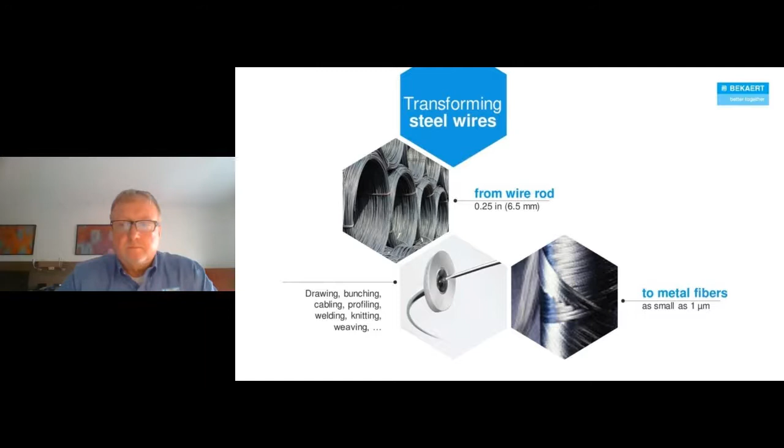I show this slide to illustrate the background of Bekaert as a solid world leader company with many resources, very serious about innovation and new technology. Located in 120 countries, Murfor Compact was launched several years ago in the European market with great success. This occurred around 2016, 2017. The success was so great, we decided to bring it to North America.

As you can see here, Bekaert's largest sector is automotive, applying many products to the automotive industry, springs, cabling, etc. A fun fact: in one of our smaller markets, 9 out of 10 wire retainers around the cork of champagne bottles is manufactured by Bekaert.

But let's get back to masonry. Our second largest sector, as you will see, is the construction market. We have many construction products, or supply the wire for many construction products. I just want to point this out: we are very serious about improving and increasing our construction sector.

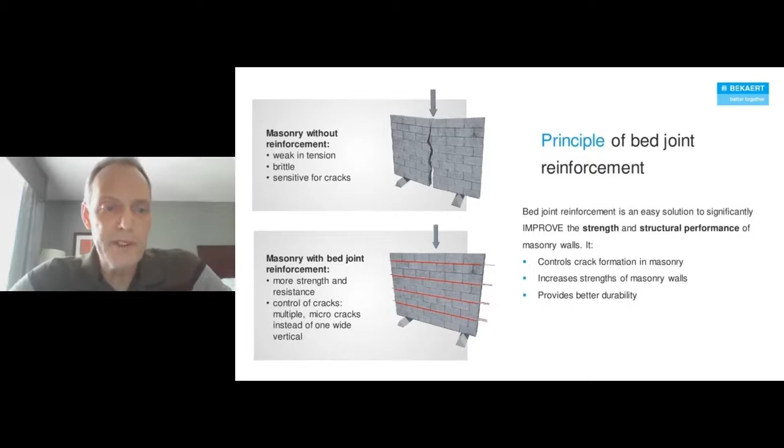As we all know, structures respond in various ways to the loadings they see. Murfor Compact is primarily used in brick veneers. One of the primary loadings on brick veneers is the response to temperature changes, expansion and shrinkage due to those changes. So we can place Murfor Compact in the joints of the brick masonry to resist the effects of temperature changes and the expansion that results from both temperature and moisture gain and loss.

We'll get into some more structural applications later in the presentation, but Murfor Compact can be used for temperature and shrinkage control, as well as for carrying vertical loads that would be placed on a brick veneer.

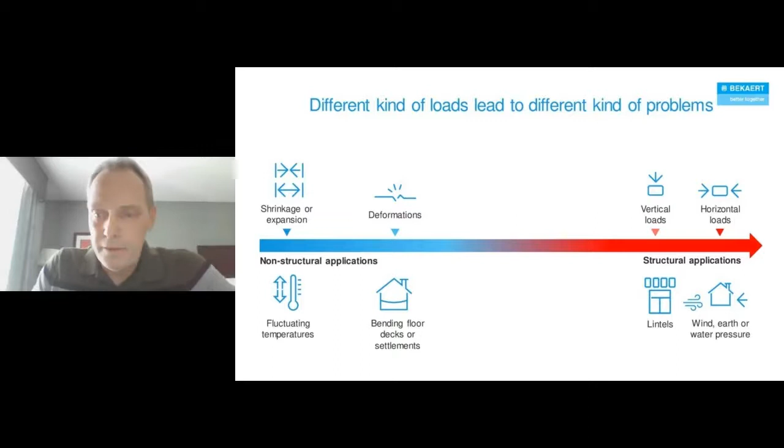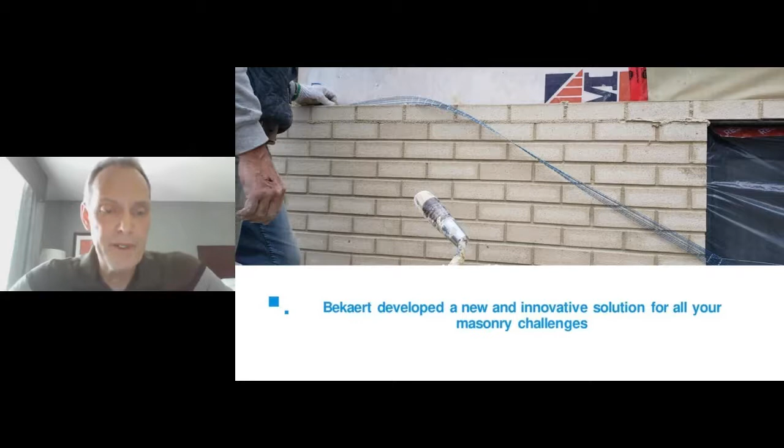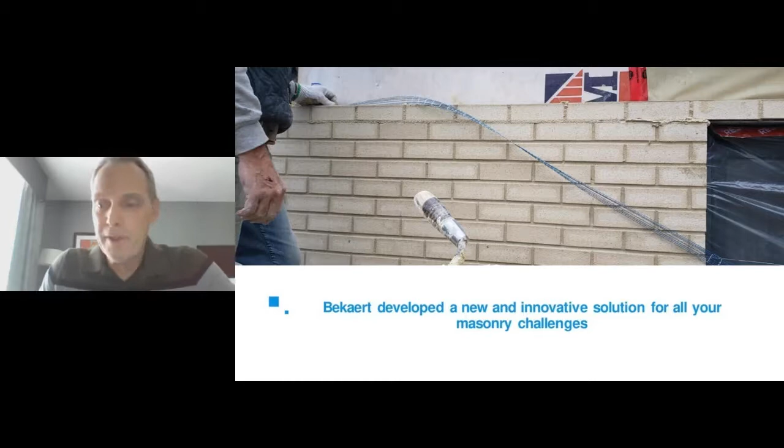This picture shows an actual project where Murfor Compact was placed into a residential project owned by an engineer. He wanted the additional assurances of crack control that Murfor Compact provides in the brick veneer. It was placed very successfully, and the owner is very happy and pleased with the outcome of Murfor Compact in his veneer.

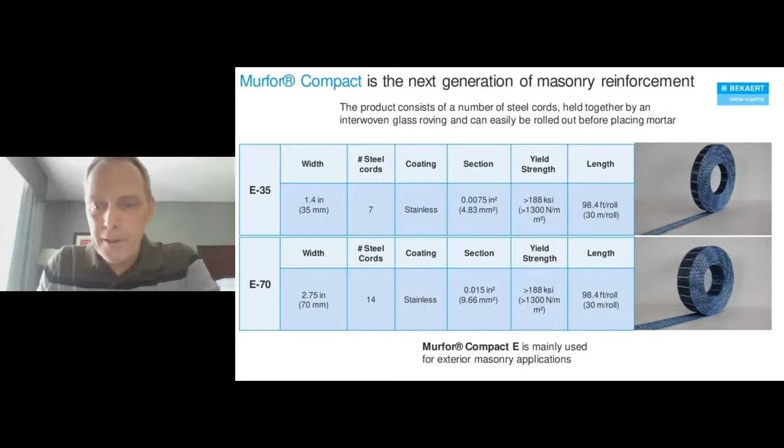Okay, so let's get into some actual projects where this product has been used. In Europe, we have used Murfor Compact in many projects throughout Europe. These are just a few examples. The round structure is a water tower in Belgium with a 164-foot circumference.

The other structures show long, uninterrupted veneers where Murfor Compact is placed to control temperature and shrinkage cracking and allow much wider vertical expansion joint spacing, for cost savings and improved aesthetics. It's also used as an alternative lintel over openings, and in walls with a great deal of openings, it's placed within the joints to reinforce the remaining brick against the effects of expansion and contraction due to thermal and moisture gain.

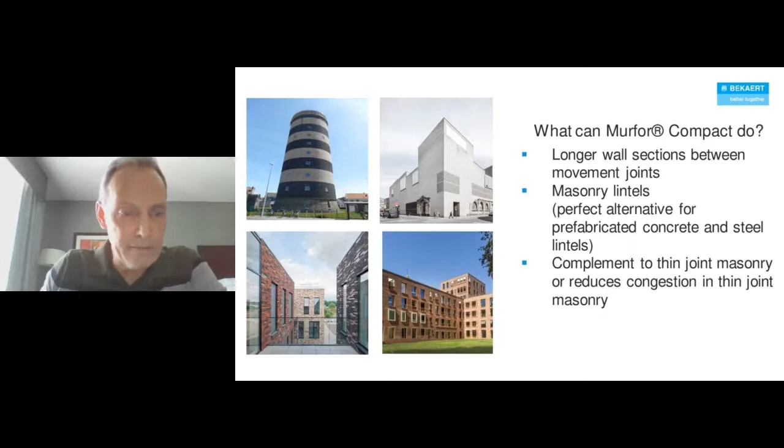So how can you take advantage of the benefits of Murfor Compact? Where do you place it? What do you do with it?

It's very beneficial being placed above and below openings. The openings in a veneer wall, or any structure, create reentrant corners that provide stress concentrations where cracks form. So just as we provide rebar at reentrant corners in a concrete structure, in a masonry structure we can provide Murfor Compact as reinforcement above and below the openings to resist the tensile stresses that result from those reentrant corners.

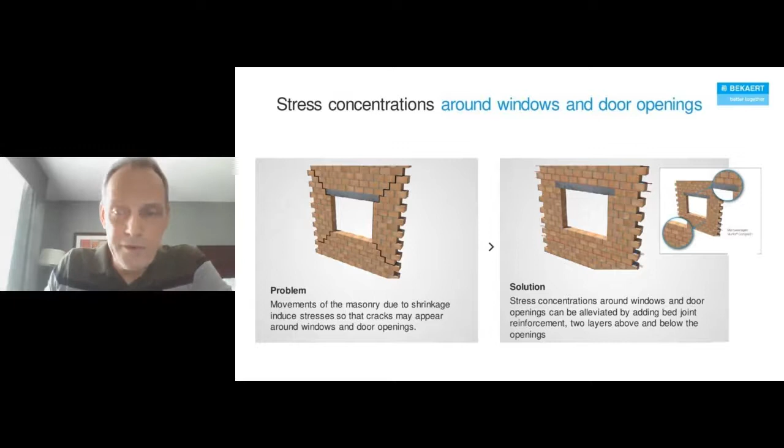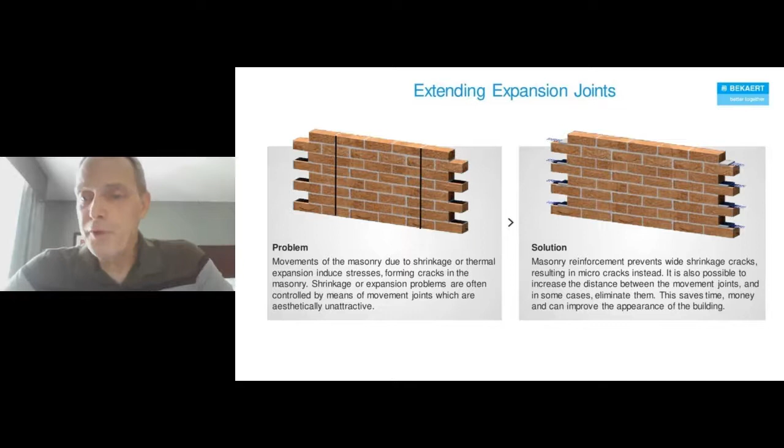It can also be placed to extend the spacing between vertical control joints. In the US, that spacing is typically 25 feet. In Europe, they go much farther than 25 feet because they use reinforcement in the joints. Providing that resistance to expansion and contraction allows vertical joints to be placed much farther apart, resulting in a much cleaner appearance, with cracks then controlled by the Murfor Compact. So the effect is the same: the veneer behaves just as a veneer with more closely spaced vertical joints would behave.

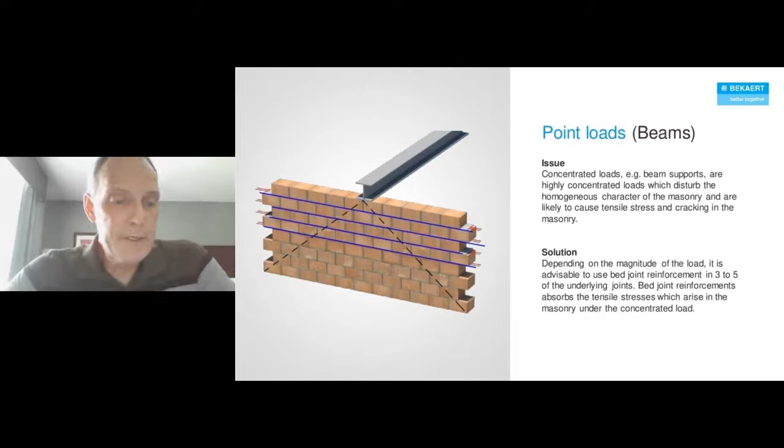Murfor Compact can also be placed underneath a high concentrated load application. A concentrated load such as a roof beam on a veneer wall would set up very high compressive forces, but the perpendicular response from a Poisson's reaction would result in a tension along the length of the wall. So Murfor Compact can be placed in the joints underneath that high point load to resist the tension from Poisson effects and control the cracking from that tension.

We can also reinforce stack bond masonry in accordance with the code. We all know there are special requirements in stack bond, and Murfor Compact can be used in stack bond masonry very easily, just as well.

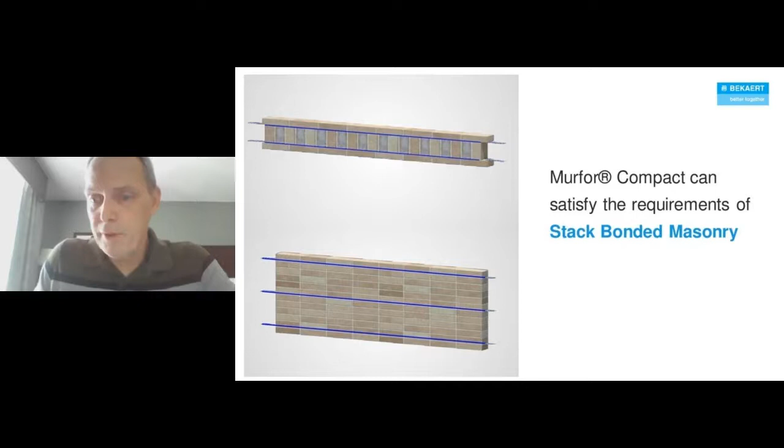In certain instances, with proper supporting conditions, Murfor Compact in the joints can also resist out of plane loads. If you have perpendicular walls behind the veneer acting as support, or a steel post acting as a wind beam, the joint reinforcement can act in the out of plane direction to resist wind loads, such as wind acting perpendicular to the face. So it can work out of plane as well as in plane.

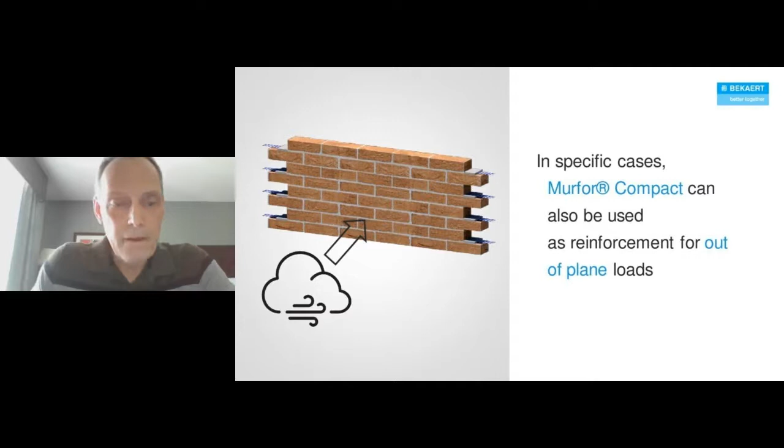It can also be placed above and below window and door openings to resist the stress concentrations from reentrant corners. This is especially beneficial where there's an opening in a long wall, a bigger expanse of veneer, where temperature and shrinkage effects are magnified due to the longer wall and greater amount of material. It can also be placed at changes of stiffness in the structure, at changes of height.

Many times a joint would be placed there, but there can't always be a joint at all changes of stiffness, such as a sloping wall, or at the top where there's an architectural feature where windows pop up off that sloping roof. It's tough to put a vertical joint there, or it would be very unsightly. So at that change of stiffness in the veneer structure, Murfor Compact can be placed in those joints to control cracking and the stresses set up by the change of geometry.

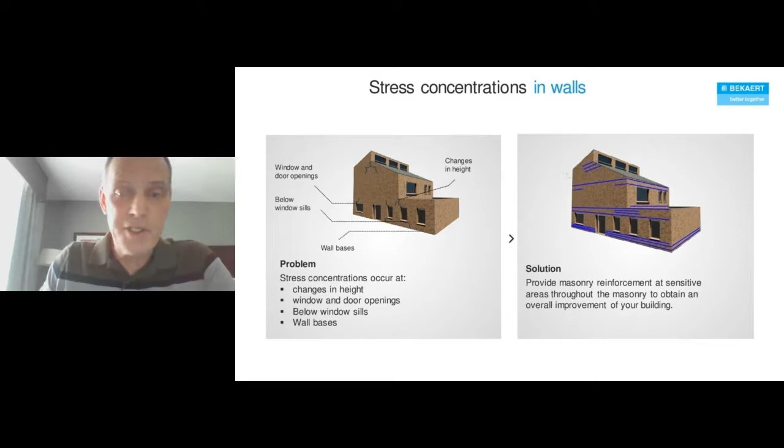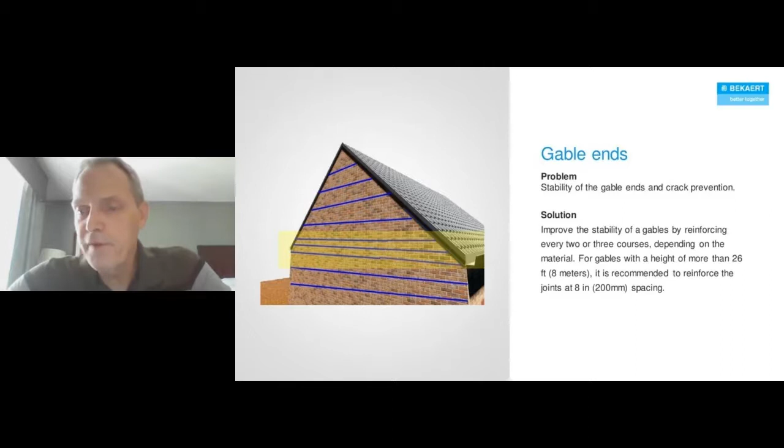This is a gable end, a perfect example of varying geometry and varying loads set up within that veneer due to that geometry: the change of mass, the amount of temperature and heat it gains and loses, and the amount of moisture it gains and loses, all varying with the height of the gable. So we can place Murfor Compact in that gable end to control cracking that would result from the varying tensile effects from temperature and moisture changes through the height of the gable.

We can also place Murfor Compact in joints over openings, where it can actually act as the tensile reinforcement in a beam. We can create a beam with Murfor Compact over openings to span the openings in lieu of traditional steel angles. This results in a much cleaner, more aesthetically appealing lintel because there's no steel there.

You see from the bottom, you don't see steel, you see masonry, the same material the rest of the wall is made from. It offers a very nice, appealing aesthetic look to the structure, as well as reduced maintenance cost. There's no long-term maintenance associated with a Murfor Compact lintel like you would have with a steel lintel.

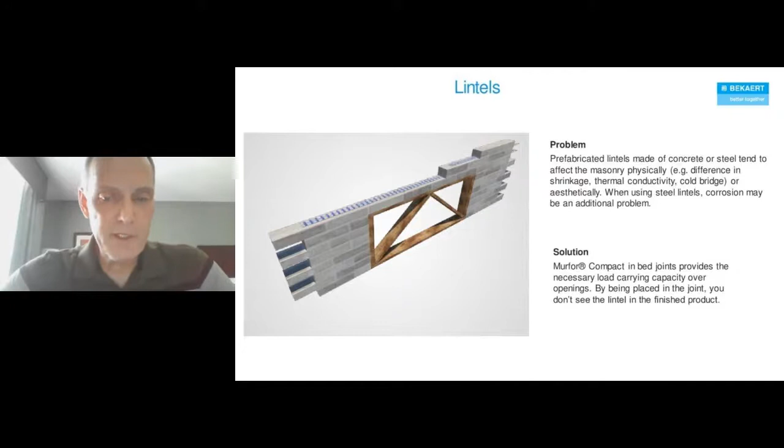We can also use Murfor Compact in specialty walls. I believe these are called claustra walls.

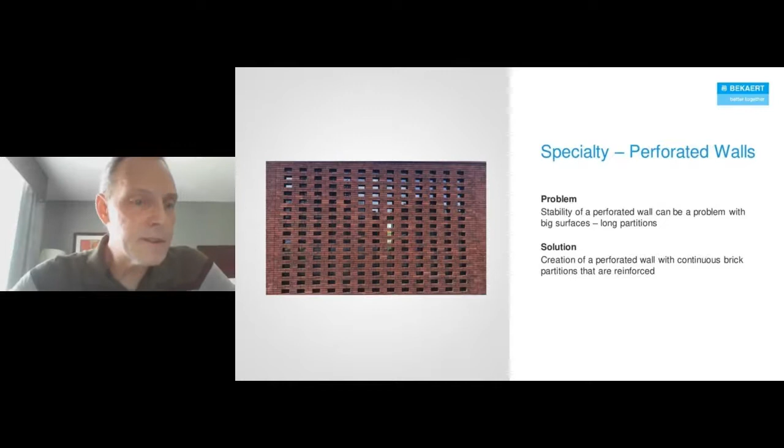Those openings set up various tensile stresses within the wall, and by placing Murfor Compact within the joints that pass all the way through, we can provide additional stability to the wall and increased resistance to cracking caused by geometric changes within the wall and the openings and the non-constant material.

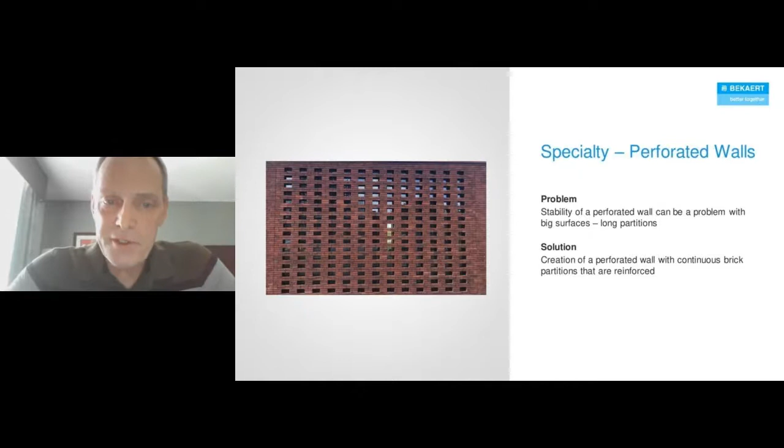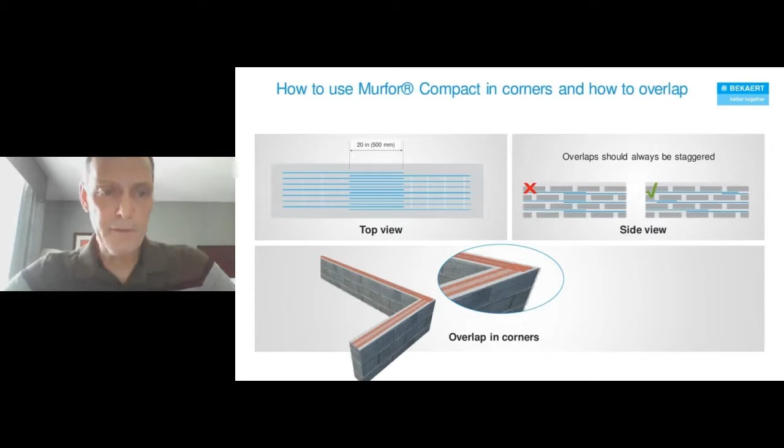So what are some details of the installation? Murfor Compact can be lapped. The splices are spliced just like traditional 9-gauge reinforcement. They're simply overlapped, and corners are also simply overlapped. Just as with 9-gauge reinforcement, the laps should be staggered vertically, just like you would do in concrete reinforcement.

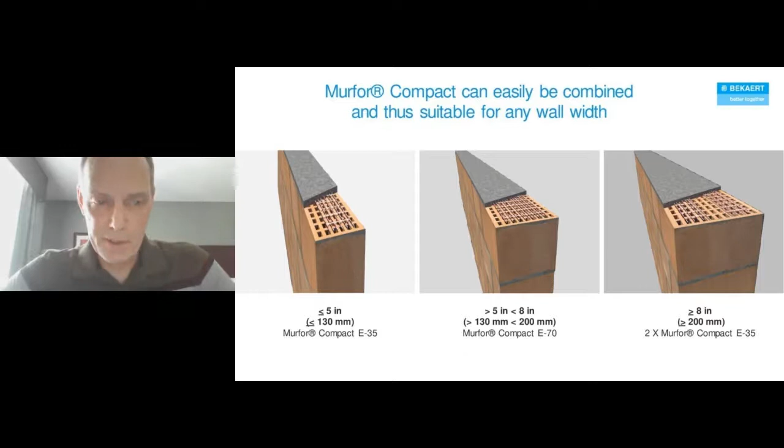As mentioned in the video, Murfor Compact comes in standard widths, but we can combine those widths so that we can reinforce a wall of nearly any thickness. So we can place multiple strips of Murfor Compact along the wall to reinforce that wall.

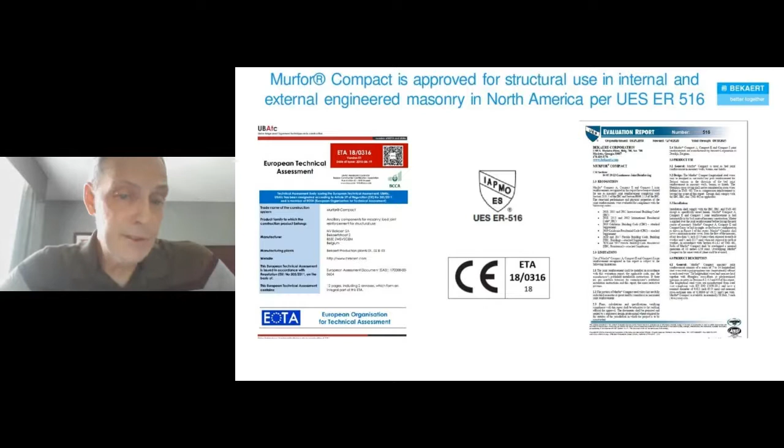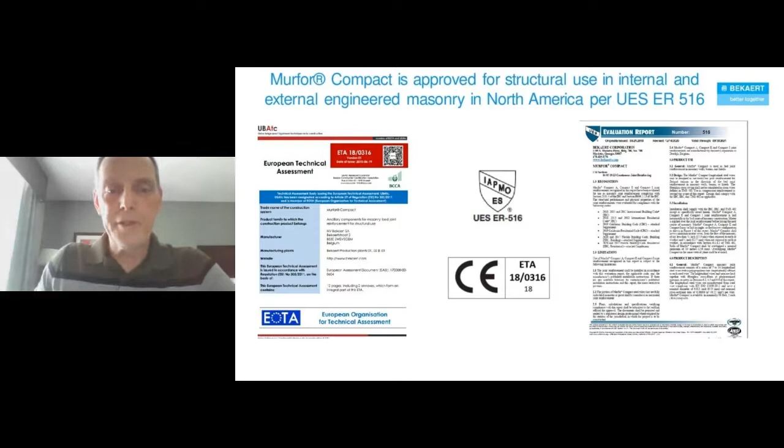I've mentioned that Murfor Compact is an alternative reinforcing material, so we have an evaluation report from the IAPMO Uniform Evaluation Service. Our report number is ER 516. This allows owners, engineers, and contractors to go to the building official to get approval for using Murfor Compact as an alternative masonry reinforcing material in structures in the U.S. This allows you to conform to the building code via the alternative material provisions provided in the IBC and the ACI.

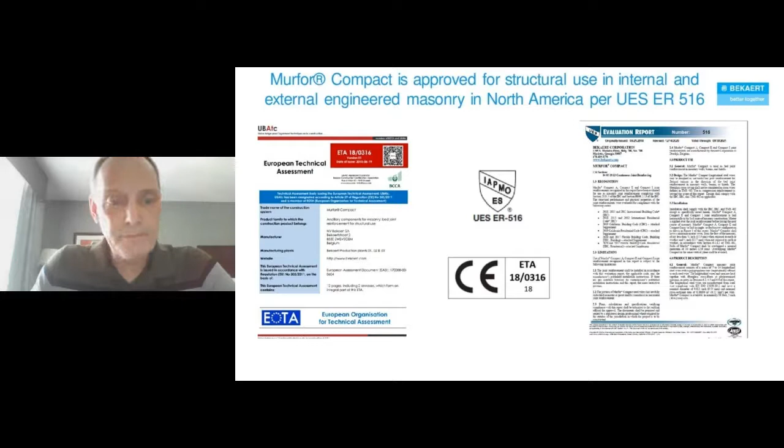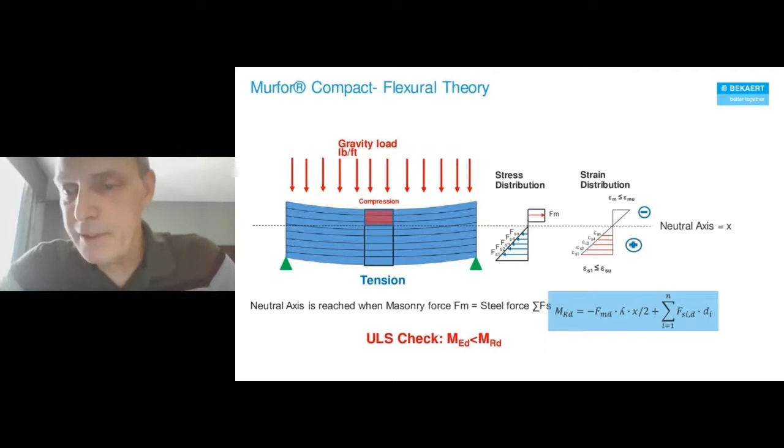Some of the more technical aspects of Murfor Compact - I won't go deeply into this, but Murfor Compact is designed according to typical conventional equations for bending stress, the classical bending theory of stress and strain compatibility. The masonry resists the compressive stresses, and the Murfor Compact steel in the joints below the neutral axis resists the tensile forces that are set up when you have a vertical load and bending over an opening.

Such as a lintel beam - this is precisely how we design lintel beams and determine how many layers of Murfor Compact need to be placed in the lower layers to carry the tension and the loading over the opening. This acts just like a precast lintel beam, but offers more aesthetic appeal - your lintel is exactly the same as your brick veneer, with no change in material, no visible steel, and reduced long-term maintenance costs.

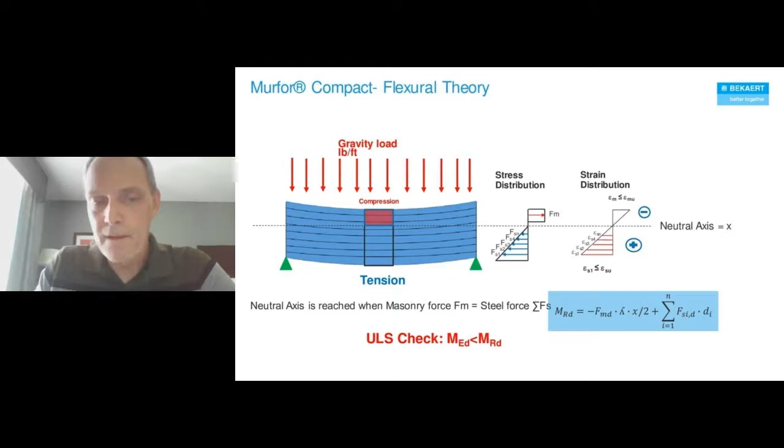So the theory is nice. That's great, I get the theory, we all get the theory. But does it really work? The proof is in the pudding.

Murfor Compact is a viable alternative for use as reinforcement in your masonry veneer.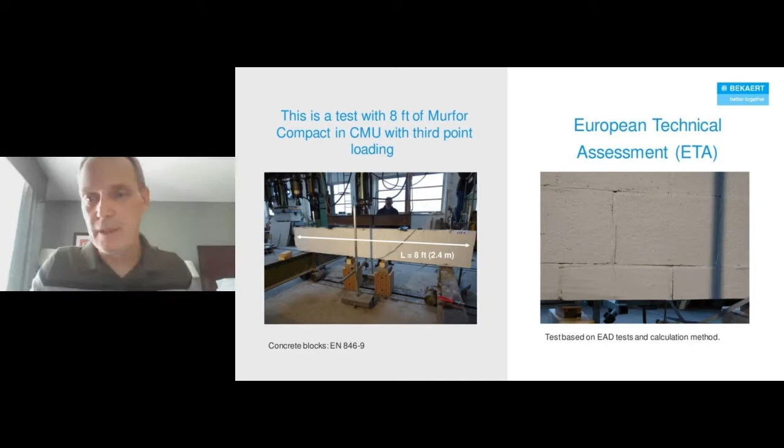Sorry about that, I was muted. Thank you, Byron, great information. Appreciate all the effort put into it. So we'll go into some references.

So as you can see, I'm going to go through several of these, and then we'll get to a summary.

Long walls, as Byron mentioned, Murfor Compact will excel on long walls because it comes in a 100-foot roll, so you have less overlap, less waste, and things of that nature - a true benefit on long walls.

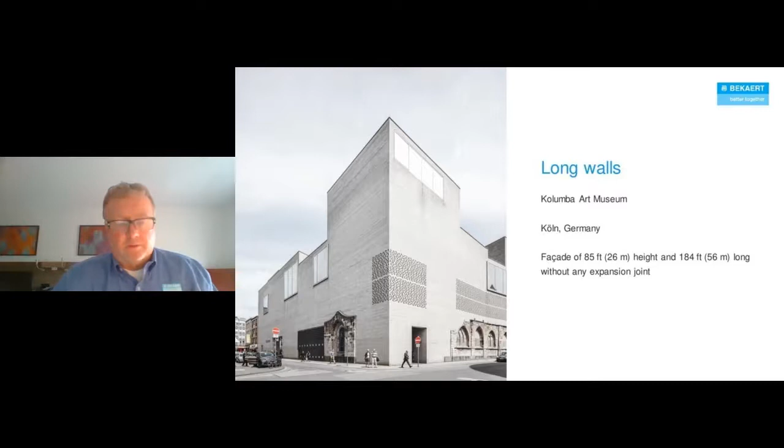Again, another illustration on this project - Murfor Compact would have been used above and below the windows, and at re-entrant corners, to help with any potential cracking and to improve on any cracking.

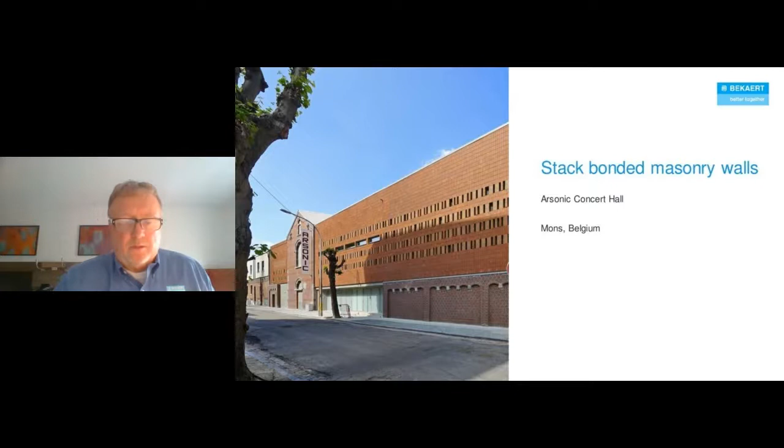Stack bonded wall. This is also a good application for the Murfor Compact to help with a stack bonded wall. This would have been multiple applications.

This would be a good time to point out that we have a full in-house technical department, so we can look at any project you have and make the proper and correct recommendation.

So we're going to go into a brief summary. I'm not going to repeat everything because we've already spoken to these points a couple times. As Byron mentioned, if you have any questions, now would be the time to enter them as I do a brief summary of the benefits of Murfor Compact.

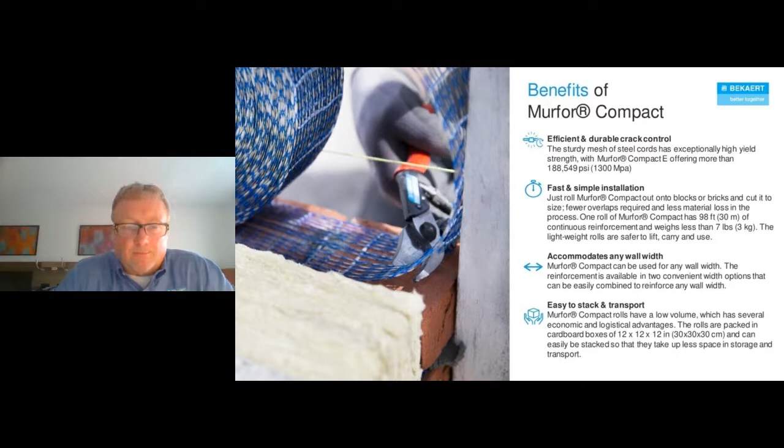To accommodate the same amount, you would need 360 sticks of conventional reinforcement. Less space on your work scaffolding, so your guys don't have the potential to trip or fall or run into 360 sticks stacked up. They would simply distribute the 12-inch by 12-inch boxes along your scaffolding, easy to access and much safer.

As mentioned, Bekaert is a world leader in wire transformation, and that sort of caused the development of the Murfor Compact. As I mentioned previously, Bekaert decided they wanted to improve masonry reinforcement, just as we have improved other sectors of reinforcement in the concrete industry with our Dramix product, and in the asphalt industry with our Fortifix. So now Murfor Compact for masonry.

It is 3 times less weight, so easier to carry, easier to maneuver on job sites. 10 times more product. Combining the two, you have half the weight with more length. 3 times the yield strength. Again, we have the higher yield strength to be able to create a thinner wire.

To this point, we are a member of the NCMA, and we were invited to participate in a year-long study putting our product and a few others into a masonry wall constructed at their site. They're monitoring the wall, and part of the study was to create and study thinner mortar joints. As you can see, Murfor Compact fits right into that category - thinner wire, thinner mortar joints.